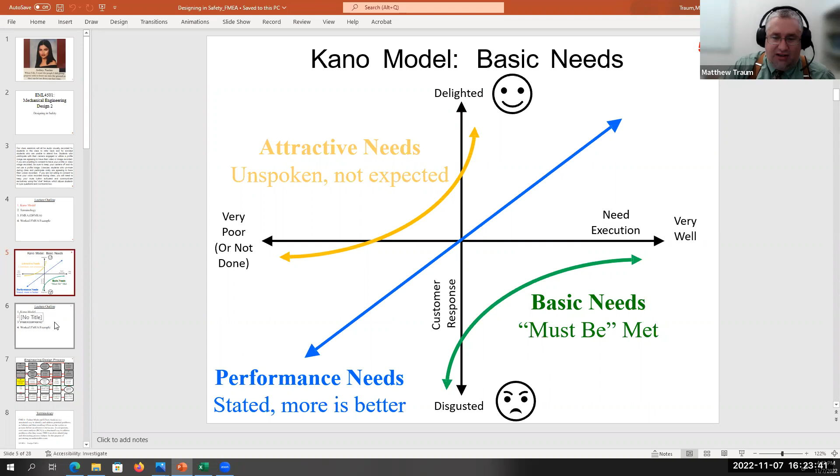But then there's this whole separate analysis technique, the DFMEA topic that Juliana is going to talk about here in a second. I've got one more slide, and then I'll hand things over to Juliana, and that is just where this kind of safety and factoring in safety in designing fits into the overall process.

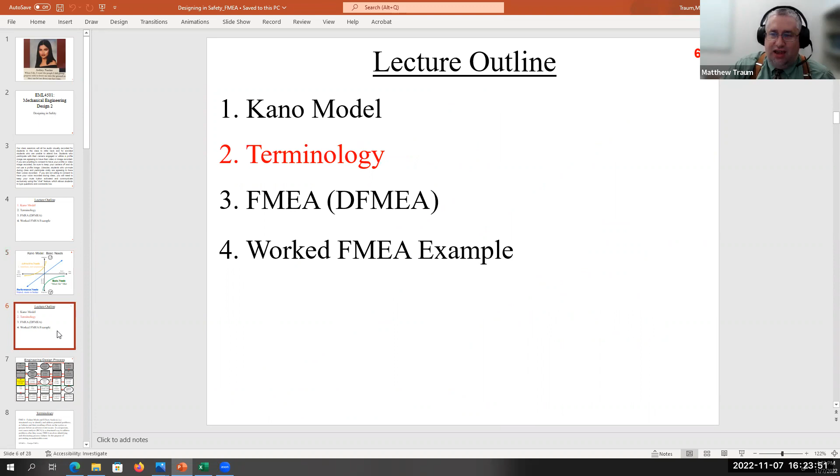In anticipation of the preliminary design review, which is coming up next week. The earlier in the process you guys can start thinking about designing for safety, the better in terms of reducing the overall cost of the development process. We'd like you to do that now at step 8, not farther on when things have already been set in stone, because it becomes much more costly and expensive to make changes later in the process if you start thinking about safety too late.

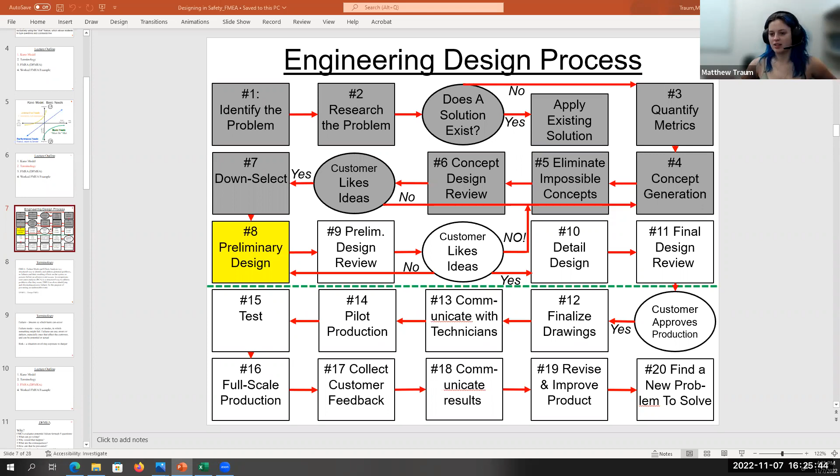Hello, everyone. So we're gonna go into the terminology, specifically for the FMEA, which is what we're going over today. FMEA is a failure mode and effects analysis, which is a way to identify and address potential problems or failures and their effects on the system and process before a failure occurs. In comparison with root cause analysis, which is done when the failure has already occurred, the main purpose of FMEA is to prevent failures from happening as early as possible.

And there are multiple types of FMEAs available. There's design FMEA, which is what we are going to learn today. There is process FMEA, which is usually done later in the design cycle. And there are other kinds. They're widely used in industry, including engineering, manufacturing, marketing, medicine, and other places.

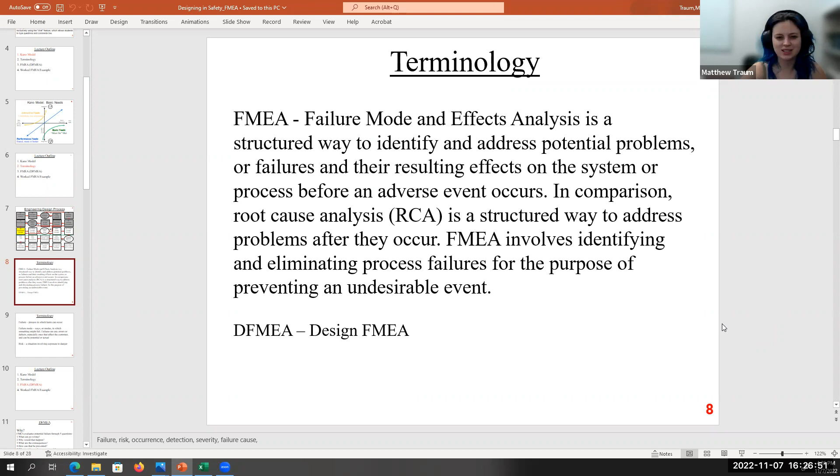And then we have failure. Failure is a process in which harm can occur, and that harm can be related to anything — it could be people, your product, the product around it, or the environment. It could be anything that can be damaged. Failure mode is a way in which that failure can occur. And risk is a situation involving exposure to danger.

Okay, any questions on the terminology?

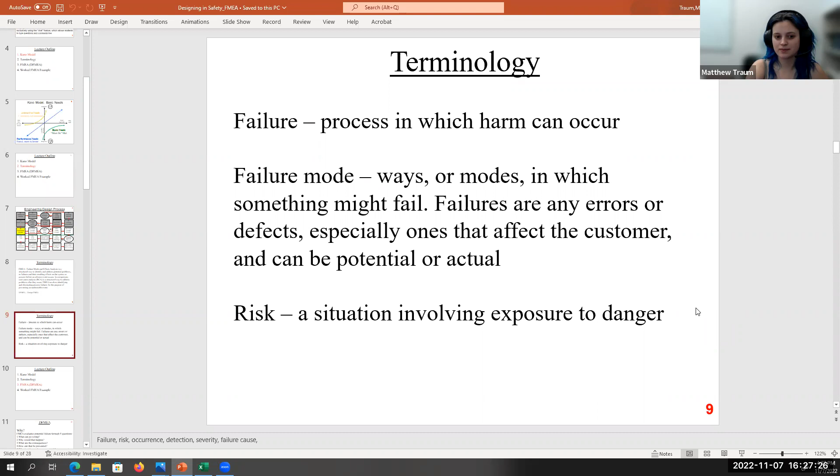Cool. All right, we are going to dive into the FMEA, or we're going to actually look into the DFMEA — the design failure modes and effects analysis. And why are we doing it? Because FMEA evaluates failures through 5 questions: What can go wrong? Why would that happen?

What are the effects of that failure? How can that be prevented? And what insights can we apply to current and future scenarios? It's really important for us as engineers to know how our products can fail and how we can prevent that, so that we don't have any legal issues or additional future redesigns or testing.

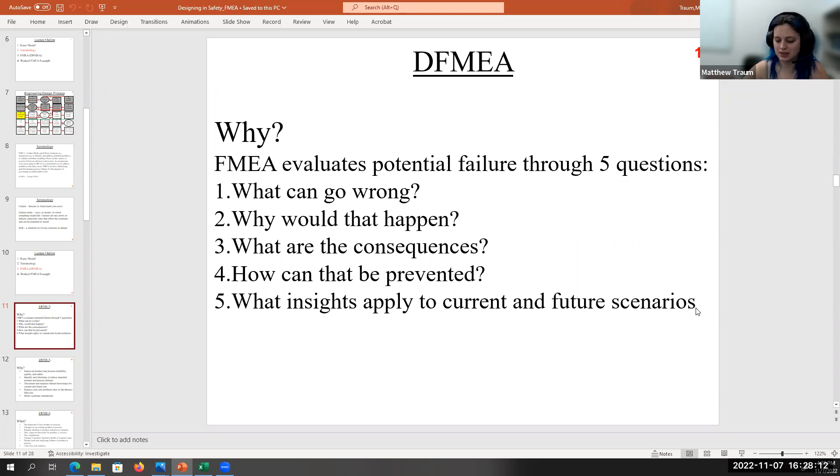The goal of design FMEA is to improve product and process reliability, quality, and safety; to identify and eliminate or reduce potential product and process failures; and, very importantly, to document and organize shared knowledge for current and future use. A lot of the time in companies, you would be able to use the previous iteration of the design FMEA for your current one, which makes your workload a little bit easier. You also share this knowledge of different failures between teams, so they're aware of that too.

But from my experience, companies don't really share that information externally. Dr. Traum said that it was a trade secret, most likely, and I would probably agree with that. No one wants to know how your product is going to fail.

Then the very important one: reduce costs and problems later in the product lifecycle. So whenever we're looking at the design lifecycle, we can imagine an exponential graph where the cost depends on the time.

The further down the line in your design cycle you are, the more expensive it is going to be to redesign something, create a new test, or remanufacture it. That's why figuring out failures as early as possible is very important, because as engineers we want to save money, or at least your company wants to save money, and we don't have an unlimited budget. Of course, better customer satisfaction is another goal or purpose of DFMEA.

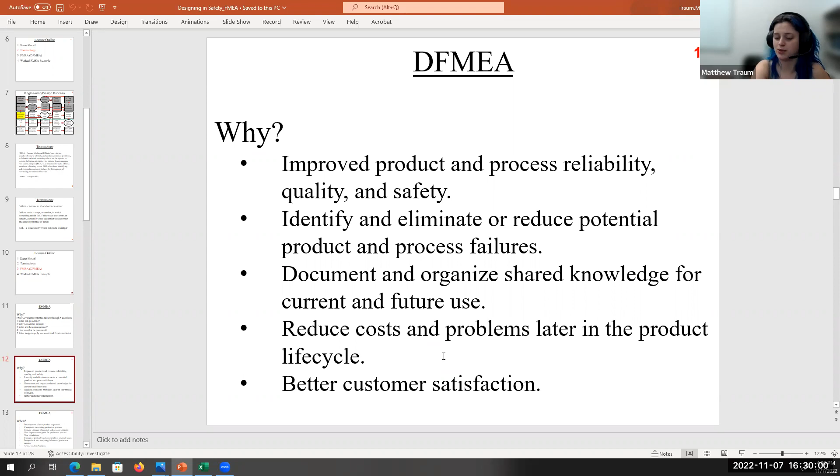We do the design FMEA specifically whenever we have a new product or process, whenever we have changes to the existing product or process, or when we're doing regular checkups. If, for example, a product has been on the market for the past 3 years or so, you might hear some reports of failures that you didn't anticipate, so you would redo the FMEA for the future iteration of the product.

Whenever you have improvement goals for the product or processes, and whenever you have new regulations, it's very important, especially with environmental regulations. If your product no longer conforms to, say, EPA regulations, technically it is a failure mode because it is now damaging the environment, or at least from the legal point of view. So you will have to redo the FMEA then.

Whenever you change a product function outside of its original scope, you technically also need to do the DFMEA. For example, the paperclip exercise in class, where we had to come up with different applications and uses, we technically had to do the DFMEA for that to make sure we're not failing anything. Finally, we also do it if we want a deeper understanding of what the failures are like for that product or process.

On the design timeline, DFMEA usually occurs after you've done your preliminary design, so the prototype. However, you can do it earlier, and it's recommended to do it after function analysis, which I believe is what you're doing right now in PDR.

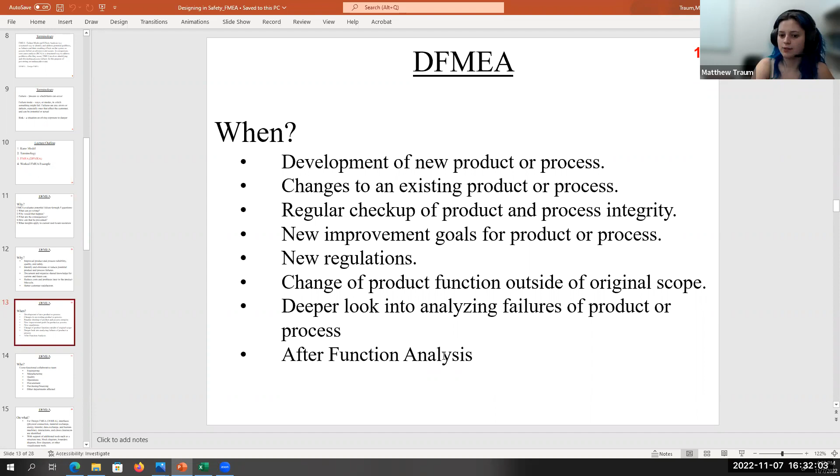And finally, who does the DFMEA? Yes, of course, it's going to be you as the engineer, usually design engineers and validation engineers. However, DFMEAs require a cross-functional collaborative team that includes all the departments affected — engineering, manufacturing, quality, operations, procurement, purchasing, sourcing. In my time, we also included marketing for that reason.

The reason why is because all of those teams have a different outlook on your product. They have a different focus in mind, and they might think of failures that you might not be familiar with, just because they're experts in their specific field. So it's extremely important to get their input for the DFMEA to make sure you're covering all the bases.

However, because it includes all those people, these processes are usually very long, and the conversation can span anywhere from 3 hours all the way to 6, 12, etc., depending on how long the conversation goes.

Finally, what we are doing the DFMEA on, or what our focus is, are the interfaces of any product. In the team interchange meeting, you looked at the interfaces, physical connections, and material exchanges between the different subsystems, and that's what the design FMEA focuses on.

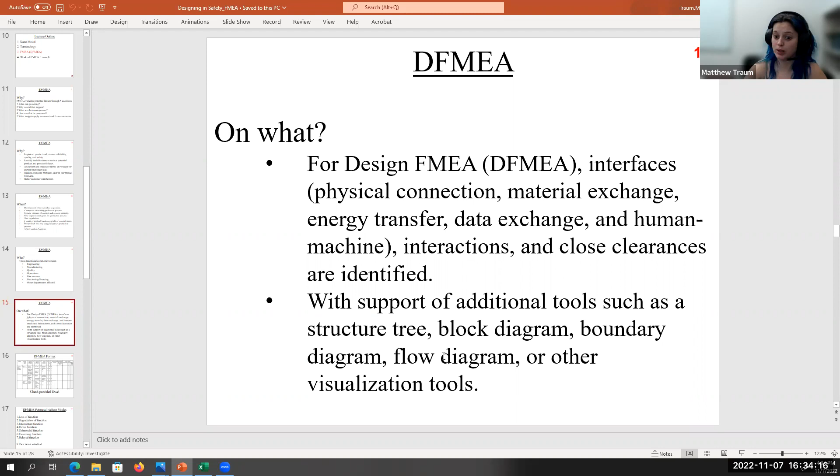But let's move on to the DFMEA format in general. We're just going to pay attention to the top part, so the headings. Generally, the format of the DFMEA tables look very similar.

At least they have very similar components to them. Different companies can have some additional points to them, or just remove some. But in general, we have the first about 10 points correct, the same every time. It is an industry standard.

So DFMEA focuses on the functions. We're going to write out the function that we do and their potential failure mode for that function. And after you figure out the failure mode, or the way that failure can occur, we write out what the effect of that failure is.

And then we have the letters S, O, and D. S stands for severity, or how bad it is that the failure is going to occur. Then we have O for occurrence, which is how often the failure is going to happen. And D for detection, or how easy it is to detect that the failure has occurred.

And of course, we need to identify the potential causes of failure and the current process controls that we have in place to prevent the failure from happening.

Finally, we have their RPN number in here, that is a product of severity, occurrence, and detection scores. It goes from 1 to 1,000. 1,000 is the maximum score. That score is used to identify the points, or the failure modes, on which the team should focus the most. So the higher the point, the more prominent the issue is, and so more effort should be put in place to prevent that failure from happening.

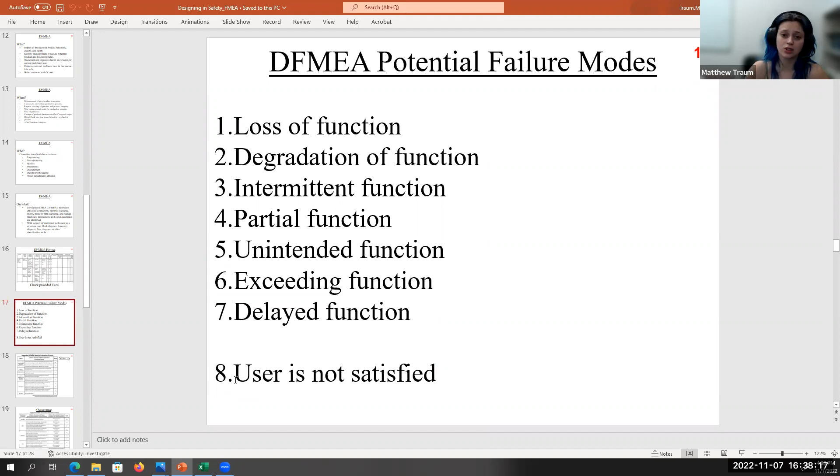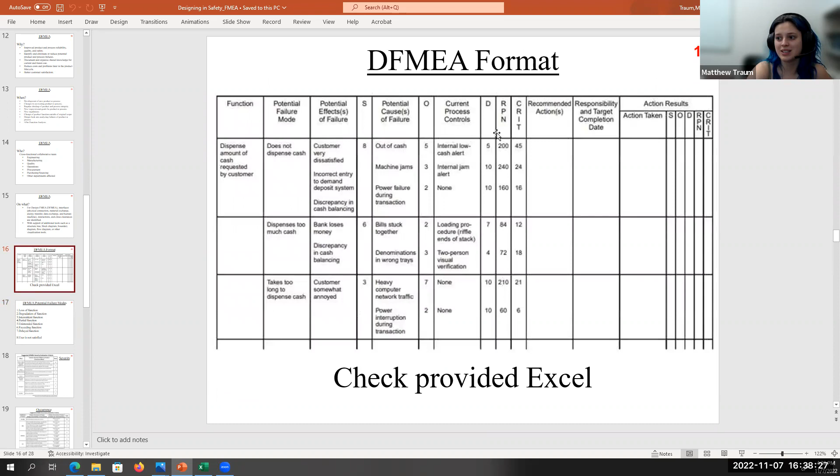Okay, let's go into their ranking tables. So for all of the severity, occurrence, and detection scores, we're not just scoring them out of the blue. The industry has created an industry standard ranking table for severity, occurrence, and detection, and they are currently taken in the manual of the potential failure modes and effects analysis. This one is specifically 4th edition. Every company may change them slightly to identify, or to bring them closer to their specific product that they're creating. However, in general, they are very similar to this industry standard.

So severity specifically, or how bad it is that the failure occurs, goes from 1 to 10, with 10 being, oh, it's really bad - it affects safe vehicle operation, or involves non-compliance with government regulation, without warning. And 1 being no discernible effect at all.

For example, in engine speak, any thermal event or fire is an automatic 10. The reason is because there is no way to operate your vehicle safely when there is a fire in the engine. Another one that would also be a 10 is, for example, your urea tank broke, and now you're not conforming to the environmental regulations. That is also a 10, because you're in non-compliance with government regulations, without warning, about environment.

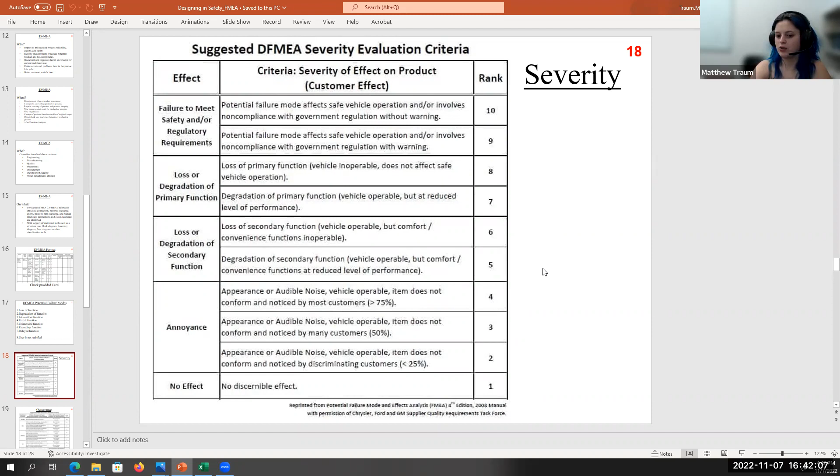Okay, let's go to occurrence. Occurrence, or how often the failure occurs, is probably the easiest one to explain. It goes once again from 1 to 10, with 10 being it occurs most often, and 1 being it does not happen at all.

As you can see on the right, we have the number of times or incidents per item, per vehicle, or per your product that it happens. So it's really easy to just pay attention to the numbers. If you don't have those numbers, which usually come from testing or prior knowledge, you can pay attention to the occurrence of cause information on the left. In general, for your FDR, you'd probably be making assumptions and paying attention to this second column. Any questions about that?

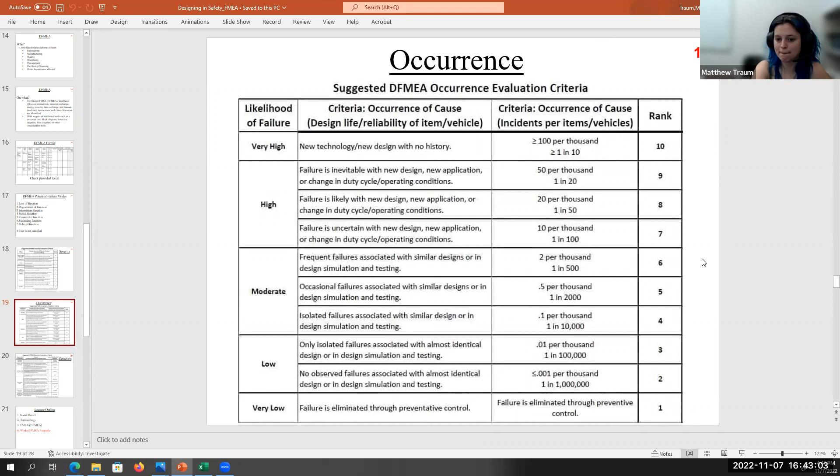Let's move on to detection. Detection, or how easy it is to find out that the failure has occurred, is also on a scale from 1 to 10. But here, 10 means it is not easy to detect at all, and 1 means it does not happen because we fully prevented it before. The most important thing about this ranking table is the differentiation between detection happening prior to design freeze and post design freeze.

Design freeze would mostly be like your FDR, for example, where you've already prototyped, designed everything, come up with the design, and you're no longer changing it. You've basically given that product to different teams to deal with and you're starting your new project. As I said, with cost and time, cost becomes exponentially more expensive the more time you spend on the project, so it's important to detect failures as early as possible. That's why prior to design freeze has a lower rank number than post-design freeze.

Those detections are generally based on testing and on different FEAs and other virtual analysis capabilities. Testing can be done as degradation, test to failure, and pass/fail, and those are repeated for post-design freeze, just with a higher number because it's now more expensive to do. Any questions?

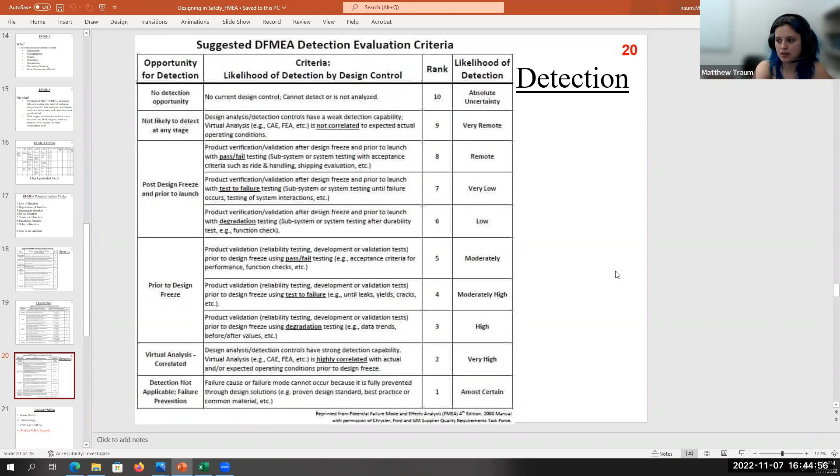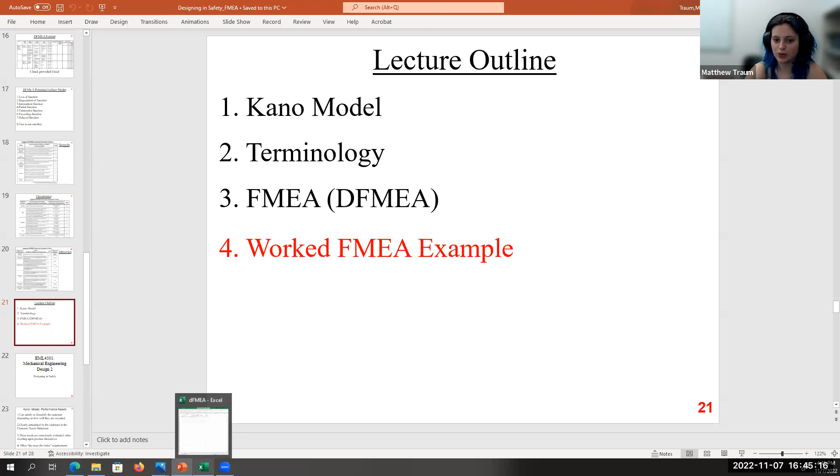No? Cool, so because there are no questions, we are going to actually do a worked example ourselves. Before we do that, I need you to come up with a product that we're going to do the example on. If you don't like to speak, you can drop it in the chat, please. It could be anything that you can think of.

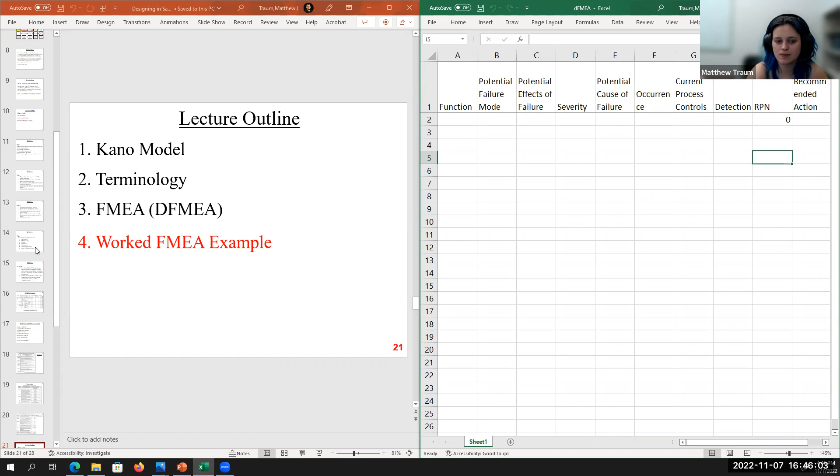The launcher. Let's start with something easy, not what we're doing for the FDR. Something out of your daily basis, like the door, for example. I don't know, something of that matter.

Because it's a desk chair, let's just grab one subsystem for now and one function that we're going to focus on, because we don't have a lot of time. So which part of the desk would you like to focus on? The desk chair.

The wheels? Okay, we're going to do the wheels again. So what is the function of the wheels? I'm thinking there is one to support the person sitting, the user, and yes, to allow mobility or to move.

So we're going to write that down. The first one is to move the chair. We're going to go with move the chair for now, and then we're going to come back later for support the user. So when you're doing your FDR DFMEA, and you will be doing it only on one subsystem, not all, so choose the one that's easier.

I recommend, and you can see the Excel right on the right, writing every failure mode in a separate row so that you can calculate the RPN number much easier. It's just easier to do that.

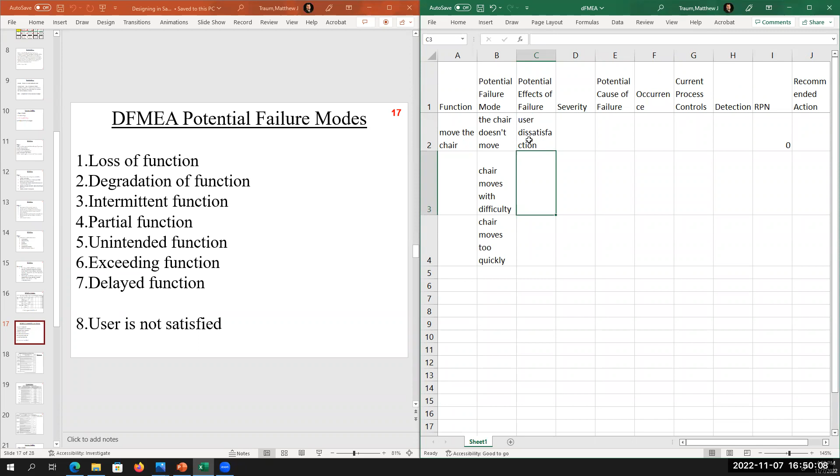What about chair moves with difficulty? Would these all be user dissatisfaction? Yes, but the chair moves too quickly has an additional point that we are looking for. For example, chair moves too quickly or slips under, right? If it slips under from under the person, let's say that.

Then you could have injury. Exactly. Then we can have injury. Yeah, injury, then once again injury. And then we're going to add dissatisfaction here, but also we can say floor damage, because if it moves with difficulty, it might scratch, there might be some marking on there.

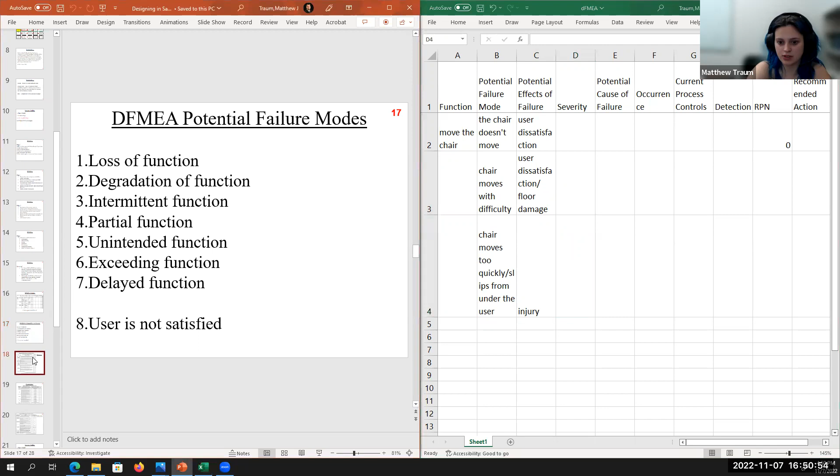So once you've done with the effects of failure, let's go into the severity. And you should see it on the left and rank all the severity based on the effect. How bad is it that the user is dissatisfied that the chair doesn't move.

Maybe 6. So what is the primary function of the chair then? To allow the user to sit. Okay, so if you're defining it like that, where their primary function is to allow a person to sit, then yes, it would be a 6. If you said that, for example, moving chair is their primary function, then it would be an 8. Okay, so we have a 6 here.

How about user dissatisfaction, floor damage, because the chair moves with difficulty? And we already said that moving the chair is the secondary function, so it should be somewhere between 6 and 5. But because the chair still moves, I would rank it as a 5. It's moving, just not great.

What about the last one? What about injury? Maybe 9 or 10. Yes, so the difference between 9 and 10 in the severity is the warning that it gives. There is no real warning when the chair just slips. So I would rank it as a 10 because it is affecting their safe operation on it. And there's probably some safety standards that the government sets, but I'm not sure on that.

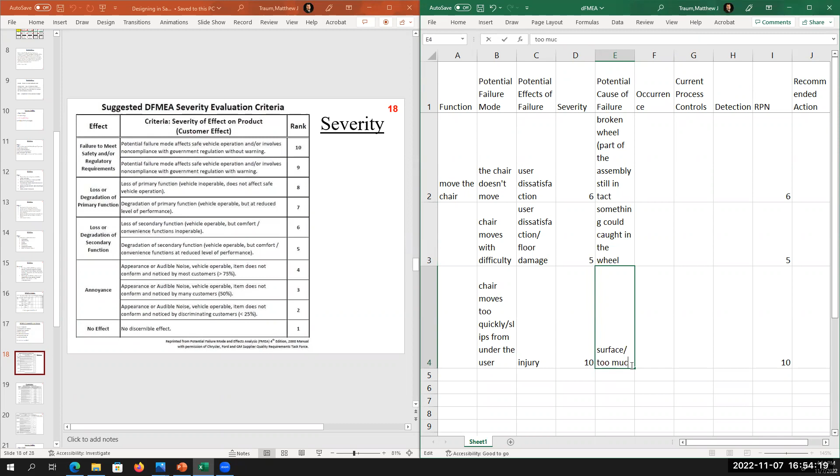What could be the cause of chair just slipping? Maybe an issue with the bearing or the surface that the chair's on. The surface could be it, and we're gonna cover it a little bit later. But also, I'm thinking maybe the bearing, maybe there's too much lubrication in it. It's just too slippery.

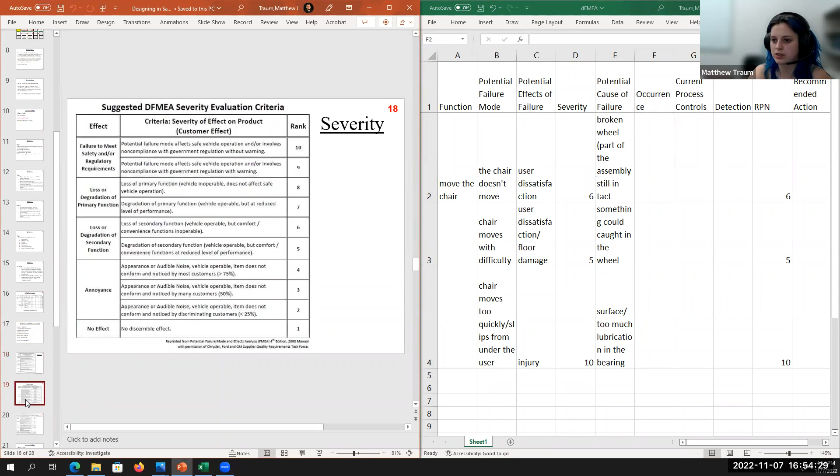Okay, so once we've done that, we are going into their occurrence and ranking their occurrence now. So how often do you think it will happen that the chair doesn't move? We're going to pay attention to the second column here.

Are we assuming that in this column, the wheel is broken? Yes, sorry, should rephrase it. How often will we get a broken wheel that would result in the chair not moving? I would probably say something like a 5, because the wheels do break, and it's an occasional failure associated with similar designs. Let's say we're creating a new chair, but basing it on other different designs we've had before with wheels, so the failures that do happen. It's probably about a 5.

Okay, what about something getting caught in the wheel? That's probably maybe an 8 or 9. Yes, so 9 would mean we can't avoid that failure at all, which I'm not sure happens as much. But I'd say 8 is a good guess.

The failure is likely with new design, new application, or change of duty cycle operating conditions. So once we go, for example, from carpet to outside, it's really easy to get caught, or even in a different room where hair can get stuck or something like that.

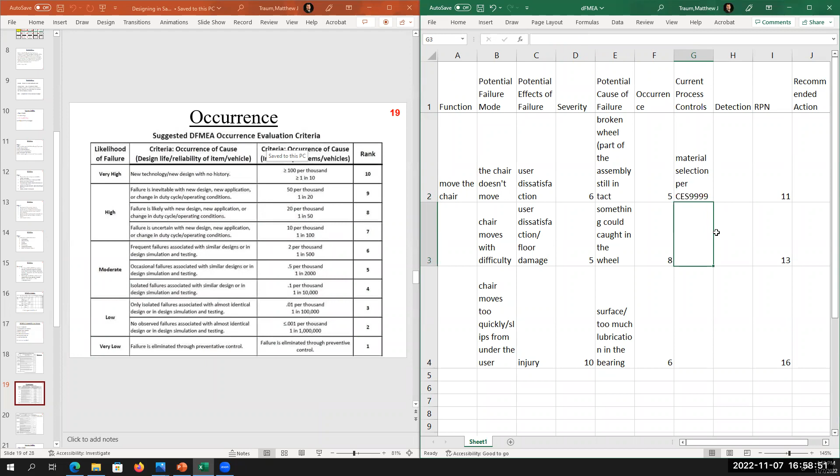Maybe controlling the clearances in the wheel? Yeah, that could be it. So that also could be a standard—let's say standard clearances per some kind of standard. Let's name it that way.

Okay, and for surfaces, current process controls—as I said before, we usually place warning labels, user manuals, etc.

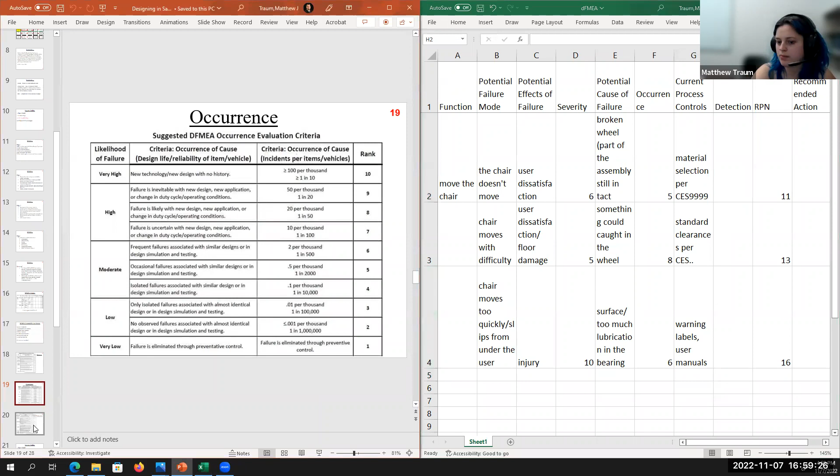And finally, let's go to the detection score and quickly rank the detections. So how easy do you think it's going to be to find the broken wheel, specifically in the design process? Assuming it's broken while you're designing, while we're testing our designs.

Okay, so the most easy. Well, testing has different cycles—there's testing done on prototypes, and testing done after the prototype has already been approved. The difference is between prior to design freeze and post. So when do you think we'll be able to figure out that the wheel breaks?

Probably prior to design freeze. Yeah, I think so too. And I think it's probably degradation testing, just because we'll likely be moving the chair a lot and figuring out when the wheel breaks off. So that would be a 3.

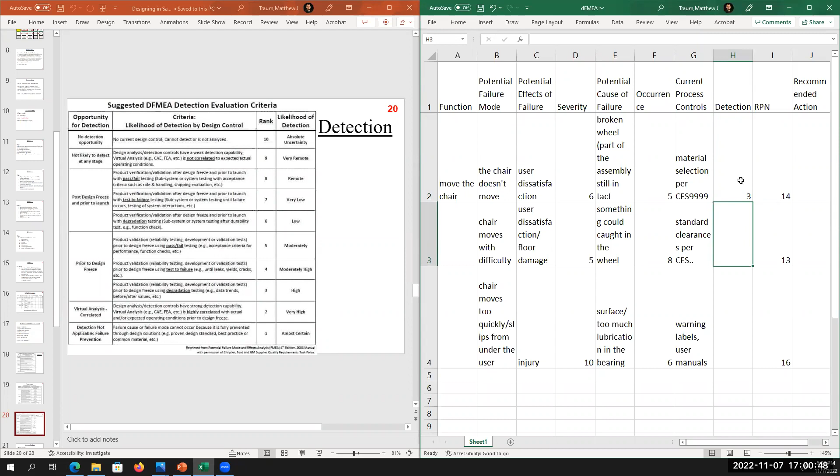What about detecting that something got caught in the wheel? Maybe, let's see—maybe also prior to design freeze, maybe a 5. Yeah, I'd agree with you. 5 is a good choice because it's pass-fail testing.

And finally, when the detection is for the surface—I personally think we can't control that because we cannot detect it. So it would be a 10.

Yeah, so that means the RPN number here is very low. Let me see what's going on—shouldn't be that, oh it's a plus, sorry, should be a multiplication. There we go. Okay, so we have the RPN number.

And that RPN number shows us that the highest score is for surface protection, right? So we have the 600, which is what we should be focusing on to prevent—and that's where you'd write the recommended action.

So at the moment, you'd think yes, there are warning labels and user manuals, so maybe that's actually enough. Sometimes the whole cross-functional team will give you an okay to go ahead with what you have, just because you have enough warning labels. However, because the severity is at 10 here as well, I'd say maybe we could have a redesign, or maybe some kind of anti-slip coating or something similar.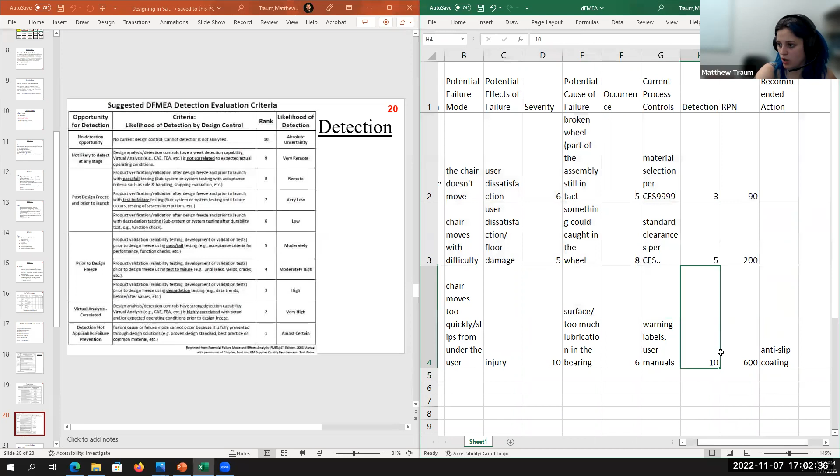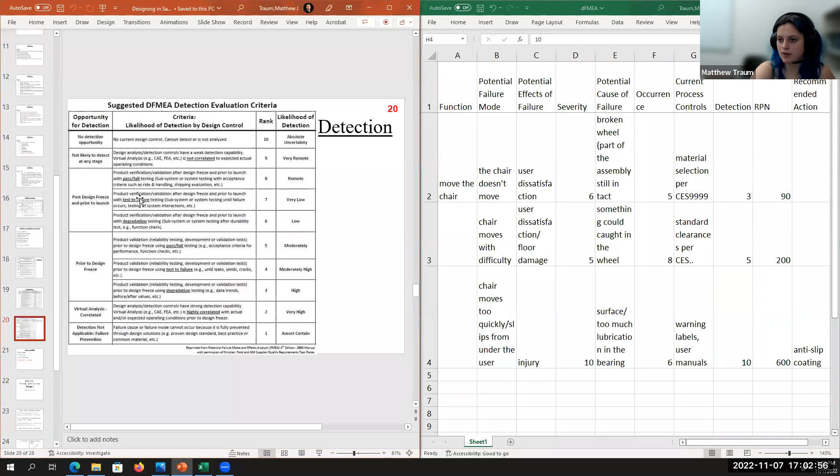Okay, so you're going to go with this process for every single line in your project. For yours, it's going to be just one subsystem—just choose one function of that subsystem, but you need to cover all the components that perform that function as well. But other than that, this is what the DFMEA is like. So if you have any questions, let me know, but if not, I think we're good to go.

I have one question about FMEA—I learned about this concept during a co-op with Cummins. I was wondering if this is like a standard across many companies. I know root cause analysis is a standard, but is there a lot of people that use FMEA in particular? Yes, it is very used.

So the problem with root cause analysis is that it's done after the failure has already occurred. That usually means, in the worst case, the product is out in the market and then the failure occurred—meaning they'll probably have to pay for warranty, for technicians' time to fix the problem, for your time to redesign it, for other people's time. That's the problem with root cause analysis, it's focused on after the fact. FMEA is used really widely.

Generally there are iterations of it done, and it's done as early as possible so you can avoid design flaws you may not think about. I have friends who interned at Lockheed and Honeywell, and they did that there as well—so it's very used.